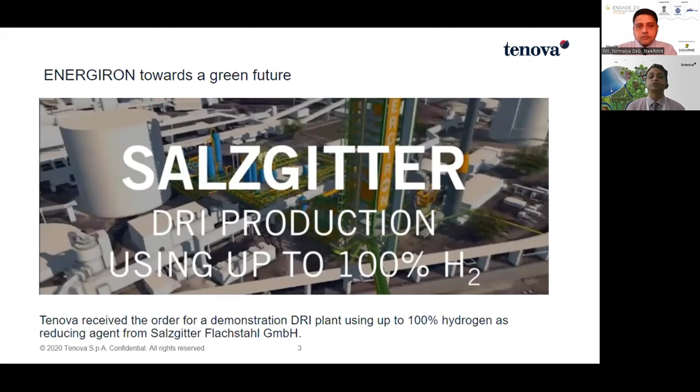Now, before China, we already implemented such projects in Salzgitter. Salzgitter is in Germany, where we are already doing a project for them using 100% hydrogen. That is basically part of Salzgitter Low CO2 Steelmaking in Germany. I'll explain more in the subsequent slides.

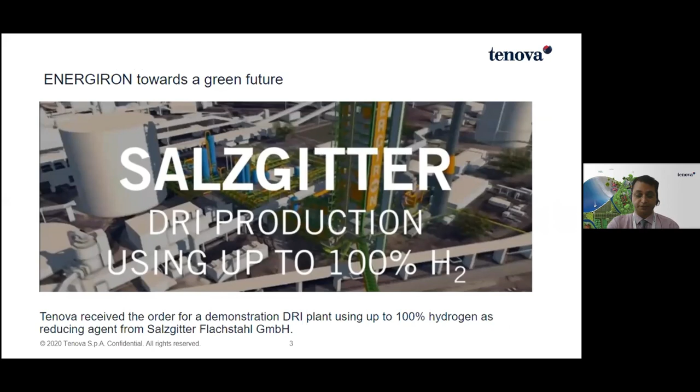Then HYBRIT. I think you might have heard about HYBRIT in the recent news. This is in Sweden, done by SSAB. This is fossil-free steel, the world's first fossil-free steel making plant. And Tenova, we are proud to be a partner of this mission. Now the plant is in operation in Sweden.

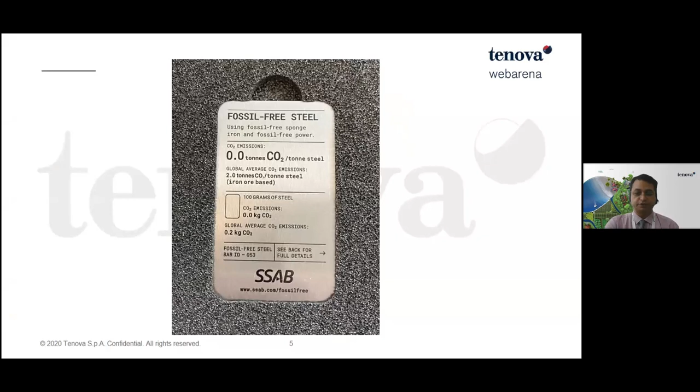You can see the fossil-free steel in actuality. It is not in concept, not on paper, but it has actually been produced. SSAB fossil-free steel, where we have supplied our DRI plant.

Now, who we are, just to give you a brief introduction. Tenova, we are part of Techint group. I'm just putting on the laser mode. So you can see we have 17.5 billion of annual revenue. Why I'm showing this slide, I'm not going to promote our company, just to make you aware that Tenova is part of Techint group, where you will find the major component in terms of sales,

Tenaris and Ternium. Tenaris and Ternium are basically our steel making group. Tenaris makes around 8.5 million tons of seamless pipe, and Ternium around 12.5 million tons of flat product. So we are part of a steel making group, and we know how steel is made.

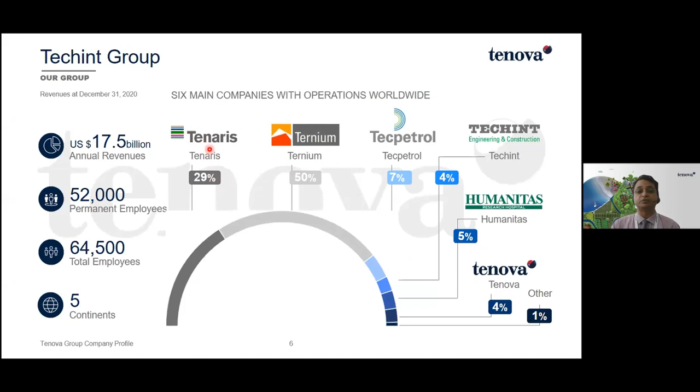So what we mean to say is that we are part of Techint group, which itself produces steel in a sustainable way, and we are associated with it. So we know how sustainability plays a very important role for Tenova individually. So who is Tenova? I'm taking just one slide and then we'll jump to the main topic.

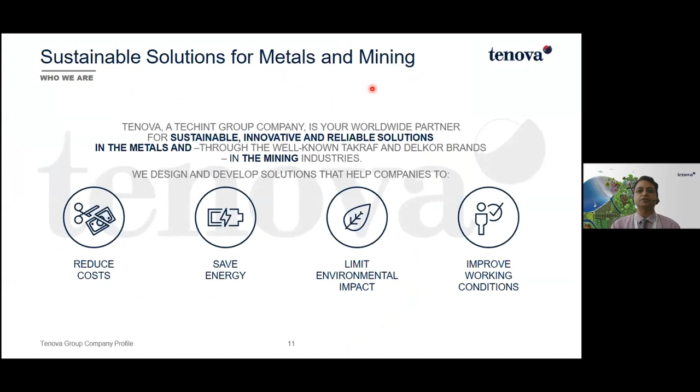We provide sustainable solutions for metals as well as mining. We are part of the group where we focus on sustainability. And considering sustainability, we have come up with a new word, where you will find Tenova appearing in that sustainability approach. So this is our mantra, and that is why we developed a new word.

We have a worldwide presence, not only in India, in all these major cities, Mumbai, Chennai, Calcutta, Bengaluru, and we are also focused on China. So in this presentation, I'm going to focus on China and India because that is the topic.

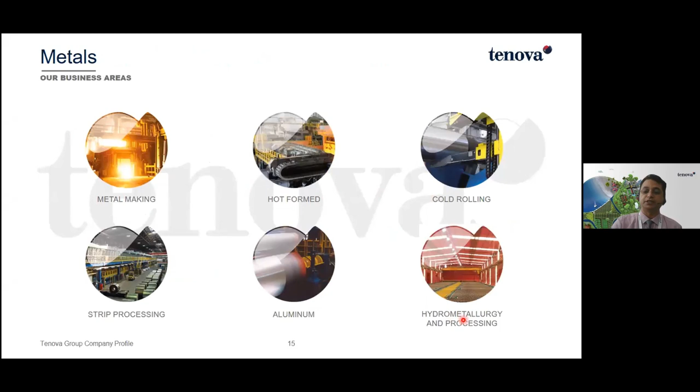DRI. So some basic concepts of DRI making I'm just going to touch upon, because in India there are a lot of coal-based DRI, there is the blast furnace route, and there are other routes also. So I'm just going to touch upon very basic chemistry, what we learned in elementary school. Reduction with coal. Reduction means reduction of iron oxide. So this is a typical example of a blast furnace, which is more into coal.

That is why you might be hearing that most countries are eliminating the blast furnace route and going ahead with either the scrap route or the DRI route. Why? The main reason is to reduce the footprint. You see, carbon is converted into carbon monoxide. This carbon monoxide acts as a reducing agent. Reducing means reduction of the iron oxide from Fe2O3 or Fe3O4. We are reducing it to Fe and CO2.

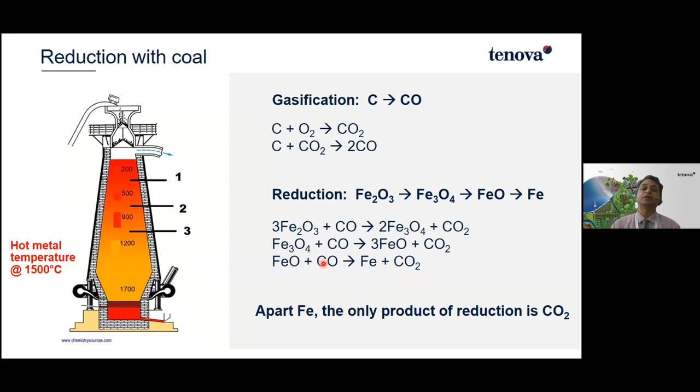So at the end of the day, apart from iron, of course, we are also generating CO2, 100% CO2. Why? Because we are using carbon monoxide as a reducing agent. Unlike that, if you are using natural gas in a typical DRI plant, methane is getting broken down into carbon monoxide and hydrogen. Here you will find hydrogen is also coming into the picture for reduction. Carbon monoxide and hydrogen, both are coming into the picture.

And at the end of the day, in such a process, in a DRI plant, we are putting in the iron ore and getting the DRI. Of course, there is no coal. They are using the methane coming from the natural gas for making these two reducing gases. And at the end of the day, apart from iron, after the reduction, you are finding carbon dioxide and water. So we can say that there is a 50% reduction in CO2 as compared to the blast furnace.

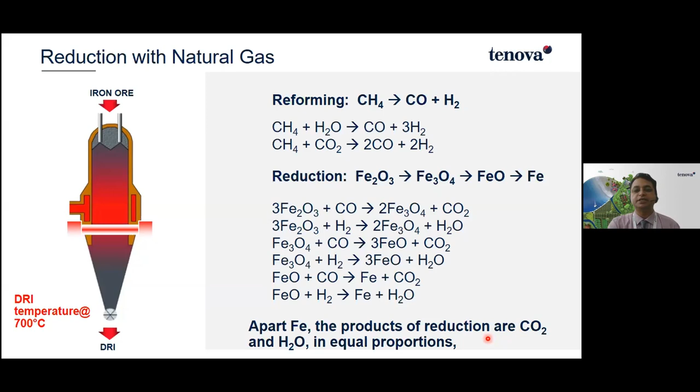But our aim is not to stop at 50% carbon reduction. We should go for zero emission. And that is the main concept we are discussing in this forum. Now here hydrogen comes into the picture. I'm talking of green hydrogen, I'm repeating, green hydrogen, which can be obtained from electrolysis of water. And you can see we can produce oxygen as well as hydrogen.

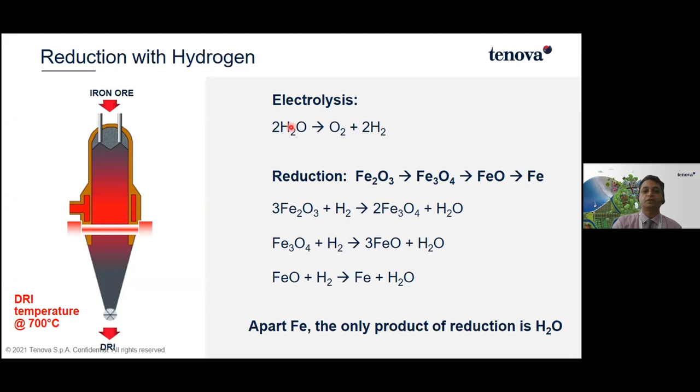And this hydrogen is used for the reduction of the iron oxide. And finally, what we are getting is only water. So this should be our mission. This is our mission for zero carbon, which we can achieve from hydrogen if we are doing it through electrolysis. So this is our DRI plant.

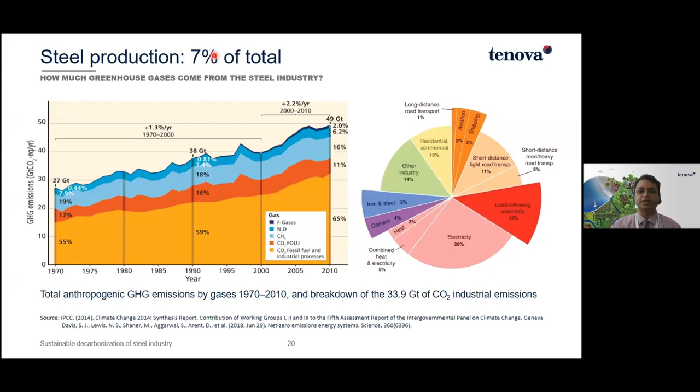Now, why are we talking about steel plants? Because it is a known fact that steel plants account for 7% of total greenhouse gas emissions. So definitely 7% is not less. So we should focus on this. That is the main concept here. Now, this chart you can see. This slide gives you the basic overall view of the decarbonization steps we have to follow.

At the top vertex of this triangle, you will find carbon, and on the downside, on the left side, you are finding hydrogen. So the aim is to move from carbon to hydrogen. This is called decarbonization, but it cannot be done in a single attempt. It has to be done in various steps.

Initially, you can see here, when it is based on carbon, of course, coke and coal are used in the blast furnace route. Yes, there are systems for smart carbon usage or smart carbon utilization. That is what people are doing, because those things we can store and utilize in the blast furnace route, as well as then we go further down.

Then there is DRI, which is based on natural gas or syngas or whatever gases are available. This is the DRI. So furthermore, 50% CO2 is getting reduced in this stage. Rather than coke, it is substituted by natural gas or any other reducing gas, which will reduce the iron oxide. Then finally, coming down, it is hydrogen.

Here, the aim is carbon direct avoidance, rather than capturing and utilizing. Why not focus on a zero carbon effect? That is, avoid the carbon from the source itself. And that is how hydrogen comes into the picture. And by hydrogen, we are referring to green hydrogen. What is meant by green hydrogen? Hydrogen generated using renewable energy to produce electricity, and that electricity goes into the water to generate the hydrogen. So that is the concept we are moving ahead with.

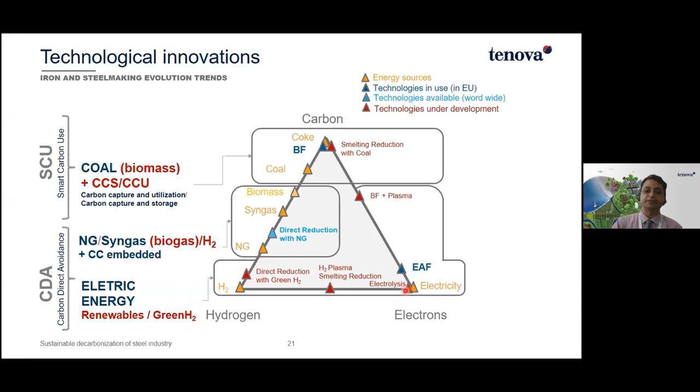Of course, there is the electric arc furnace, which uses electricity. That electricity too, if we can generate it renewably. That is another topic which we can discuss.

Now, the main question is how to make steel in future. On this slide, you can see our understanding of the steelmaking process based on the conventional iron making route, DRI and EAF, using natural gas in the present scenario, but also open to take hydrogen if available, and it will replace the methane.

And in our DRI model, in the next slide, I'll show you that whether it is natural gas or hydrogen, it hardly makes any difference, because these two gases act as reducing agents, as I have shown you in the previous chemical equations. The iron is getting reduced, and that can be melted for steelmaking. So hydrogen, if available, can substitute the natural gas.

And as for how hydrogen is generated, the main thrust should be renewable energy. That is more important, whether it is windmill or solar. So we generate the electricity, and in the electrolyzer, convert the water into oxygen and hydrogen and make green steel.

So the main theme here is that we should be ready with the flexibility of using whatever reducing gases are available, and our adaptability and preparedness for the future. That is more important, and China is already on this path.

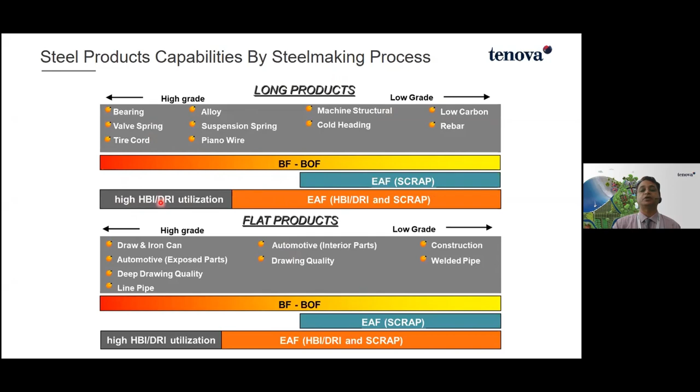For making high grade, you need some virgin source like pig iron or DRI or HBI to make high grade steel, whether long product or flat product. So if one is installing DRI, it can cater to both long as well as flat products for low and high grade. So it can be a substitute for BF if you are opting for DRI, being a virgin source.

Now, this was the brief about the chemical scenario, economic scenario, market scenario, and how we can move ahead with DRI making based on hydrogen. Here you can see our HYL DRI technology, jointly developed by Tenova and Danieli, and this is what we are going to brief you on in the next slide.

Here you may observe there is selective removal of CO2, because if you are using natural gas, definitely there will be CO2. As I mentioned, 50% will be CO2 and 50% water. So that 50% CO2 we are also not releasing into the atmosphere. Here the carbon capture unit and carbon capture storage, smart carbon storage units come into the picture.

In our system, this is our DRI plant. I'll just explain. We put in the iron ore and finally we get either cold DRI or HBI, or hot DRI into the adjacent electric arc furnace.

And nowadays the trend is to make pig iron. This is a substitute to the blast furnace, an alternate route of making hot metal. You put the DRI, and the DRI we get in our furnaces, in our DR module, in the HYL module, is high carbon DRI. High carbon DRI means carbon content from 1.5 up to 5%. So if you are using 4%, 3.8%, or 4.2% carbon, it's very good. If you install an OSBF, open slag bath furnace, this is basically a type of DRI melter in a reducing atmosphere, and we get hot metal with exactly similar composition to blast furnace hot metal.

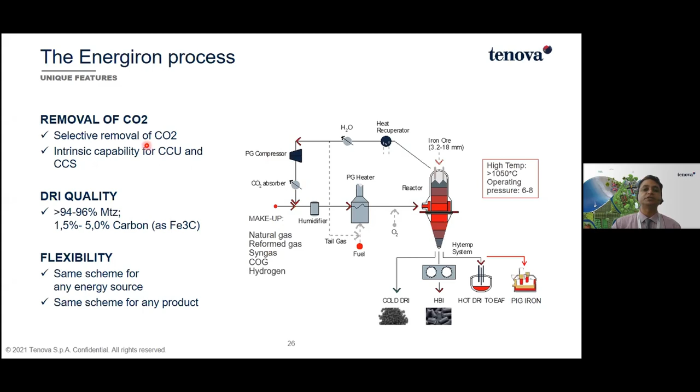Yes, here is the CO2 removal system, as I was mentioning, we inherently remove CO2. This is very important, because if you are using pure hydrogen, there won't be any CO2 generation. But in the case of methane or any other gases, there will be some CO2 generation. What we do, through a selective removal system, is remove 60% of the CO2 generated in the system, and this CO2 gives added value to you as a byproduct. It can be used for food and beverage industries, production of dry ice.

It can be pumped into oil wells for boosting oil production, like the people at Emirates Steel are doing. Companies like Ternium and Tenaris sell it to Linde and other companies for food and beverage industries. In Indonesia, they use it for food industries. At JSW Salav in India, the CO2 is sold to Air Liquide for making dry ice. Emirates Steel, as I mentioned, uses it for enhanced oil recovery. So whatever CO2 is generated, we are not emitting it to the atmosphere—we are capturing and utilizing it properly.

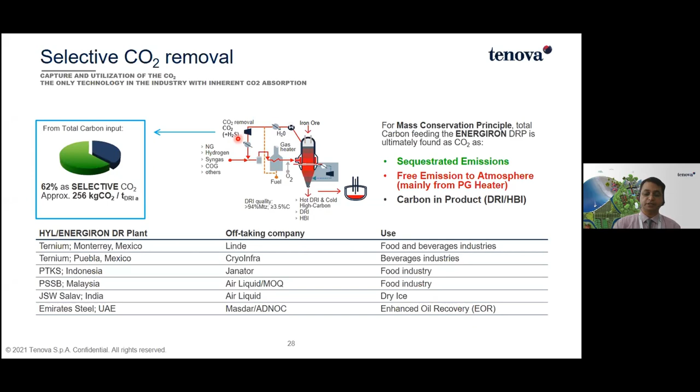Now, pig iron production via the DRI plant—that is what I was just mentioning to you before.

Yes, more importantly, here you can find the DRI plant clubbed with an open slag bath furnace. This is a reducing furnace beneath it. What is the advantage of this? One feature is that we are producing high carbon DRI on top—in our system, we produce high carbon DRI more than 4%. And there is a reducing arc furnace, basically a submerged arc furnace.

It appears like a submerged arc furnace, but we work in a brush arc mode. Basically, it does the reduction and helps us melt the DRI from 600 degrees to 1400 degrees centigrade, same as blast furnace hot metal, and it can be poured directly to the torpedo ladle. The other advantage is that we can maintain the BOF facility downstream—we just have to replace the blast furnace. No need for occupying more space; everything happens in a vertical chamber.

A very important factor here is that we are not depending on DR grade pellets. BF grade pellets can very easily be utilized, so we don't require any DR grade pellet—only the BF grade pellet, a low cost pellet, can be used. Why? Because the gangue, whatever comes with it, can be removed in our open slag bath furnace—OSBF, we call it. And the slag we get can also be used, just like in a blast furnace, in the concrete industries.

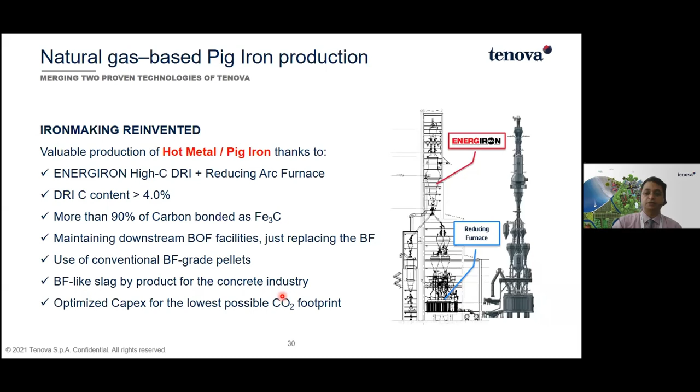Coming more into this concept, pig iron production via DRI. Here you can see the real plant. The DRI is on the top and OSBF, open slag bath furnace, in the bottom. There is a provision for removing the slag, just like in blast furnace, and we can also tap the hot metal in the torpedo ladle, which can be utilized in the existing downstream facility. So there are various advantages of this type of furnace.

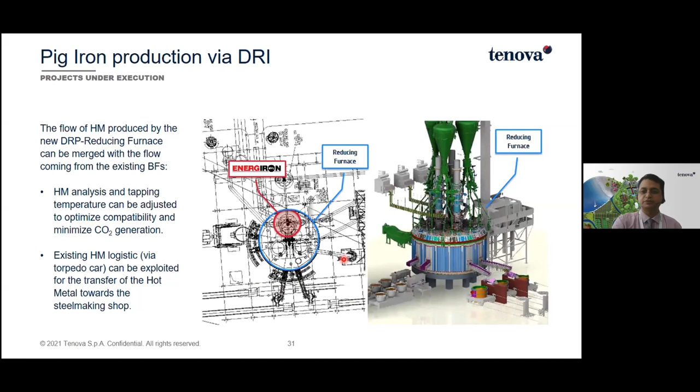You don't need such a big transformer as compared to the electric arc furnace, DRI and electric arc furnace route, wherein you need a high transformer, flicker, then SVC. Those things are not required. This is why it appears like a submerged arc furnace having the Soderberg paste electrode. The refractory life also lasts up to 5 to 10 years. Unlike in electric arc furnaces, the building is very small. There is no building as such. It is installed just beneath the DRI plant. So this is one of the concepts already being implemented in various places.

Hydrogen-based DRI. Now we are coming back to the topic. Carbon capture unit utilization, carbon capture utilization, or carbon capture storage, whatever it may be. Our aim should be carbon direct avoidance. Directly we have to avoid the carbon.

So you can see this is the DRI plant. As a reducing agent, what we are using is hydrogen, pure hydrogen. Hydrogen, how is it getting generated? From electrolysis. And electrolysis, how are we getting the electrical energy? That is from renewable energy. We are not using any thermal energy.

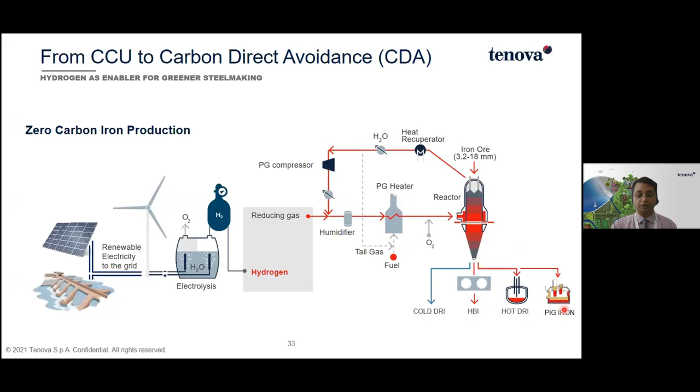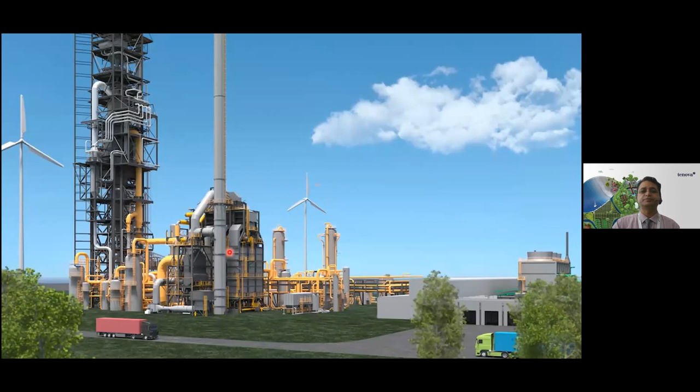And this is the scheme what we have just explained to you, that we can be able to make whether it is cold DRI, HBI, hot DRI, or pig iron. This should be our vision: DRI plant clubbed with the solar panel and the windmill, and we generate the electricity, and that electricity can be used. So this is a total iron making facility. This is a process gas heater, and this is basically our DRI tower.

Experience of using hydrogen. Then you may ask, what is the experience of using hydrogen in our HYL technology? Even if it is methane, we are using hydrogen as our reducing agent as compared to carbon monoxide. So the more the hydrogen, the happier we are as a technology supplier, as a process maker. So the same scheme can also be fitted with high hydrogen.

You see here, we have done this in the 90s, some 30 years ago. With 90% hydrogen we trialed and tested, well proven, not an issue. That is why what we are thinking now with hydrogen, we have already done long ago as a pilot test, and it is quite successful, and that is why we are available in the market for using this type of hydrogen based DRI.

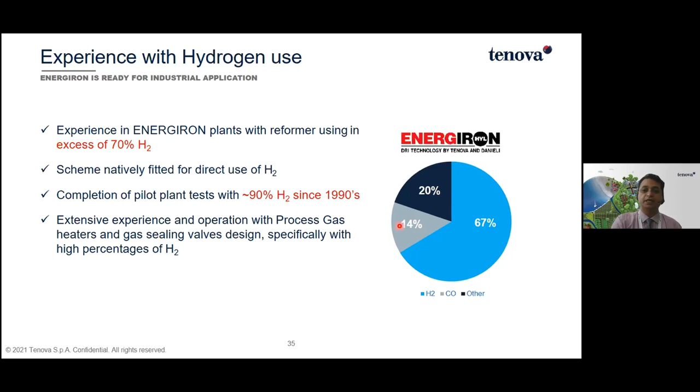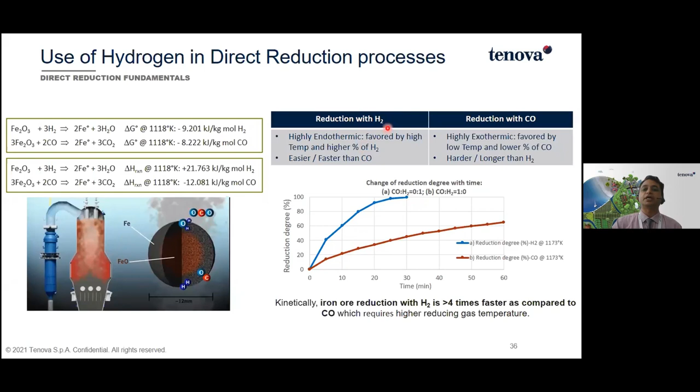I'll explain the advantage of hydrogen as compared to carbon monoxide. Of course, carbon monoxide generates CO2, but hydrogen doesn't generate any CO2. From an energy balance point of view, there are two reducing agents when reducing these gases: either hydrogen or carbon monoxide. But with hydrogen, apart from not generating CO2, the other advantage is the reaction is very fast. If hydrogen reduces iron oxide, it is 4 times faster compared to carbon monoxide. That is why we are able to utilize more hydrogen as a reducing agent, because our purpose is to reduce the iron oxide, and that is what we are doing.

Yes, I was mentioning about the pilot plant, what we have been doing in the past in the 1990s. This is the actual plant. We did it as a pilot plant, but it is not on the lab scale, it's an actual plant. We installed it and tried it in the 90s for 90% hydrogen. We did everything, we made it, and now the same concept is being adopted at various steel makers.

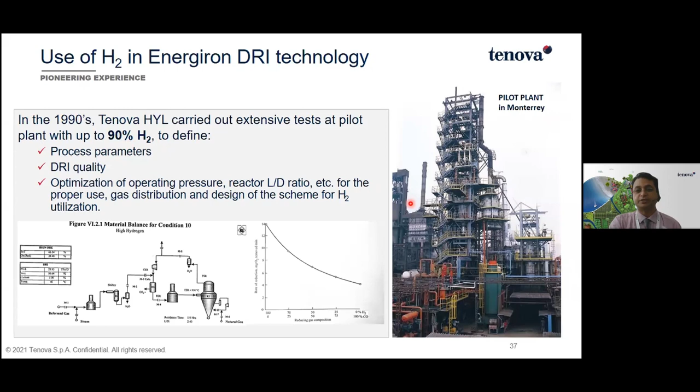It is more efficient because we are working at high pressure as compared to the other technology available in the market for gas-based DRI. In our system, we are working at high pressure. The reactor itself is pressurized, 8 bar, as compared to the other technology available in the market at 1.5 bar. With high pressure, you get high temperature also, definitely. The equipment is much less, and more importantly, we are able to use very little electrical energy compared to the systems available in the market which work in the low pressure system.

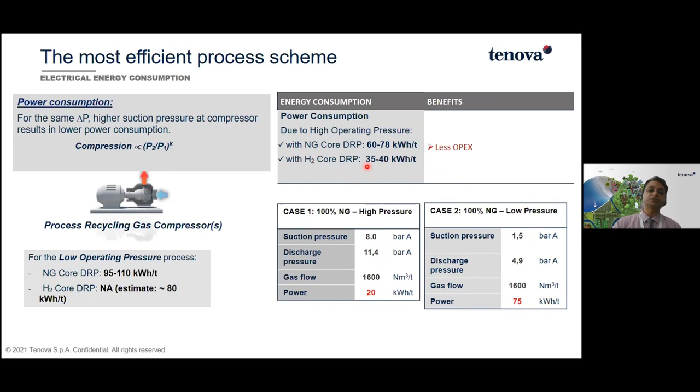That is why OPEX is also very, very less as compared to. Even furthermore, if we are using hydrogen in the same proportion, it is much better as compared to natural gas in terms of energy consumption. So in this slide, this is what we are showing, the energy benefit in terms of switching from natural gas to hydrogen.

Because in China, or wherever we are installing this plant, those plants are equipped to use either 100% nitrogen, 100% natural gas, any proportion like 35%, 55%, and gradually to 100% hydrogen, and vice versa, or any combination of gases. But if you are using more hydrogen, the energy consumption will be very less. So this is what we are trying to show here.

And coming to the CO2 emission, definitely there is a benefit if we switch from natural gas to hydrogen, and if that hydrogen is green hydrogen, then it is called zero carbon emission.

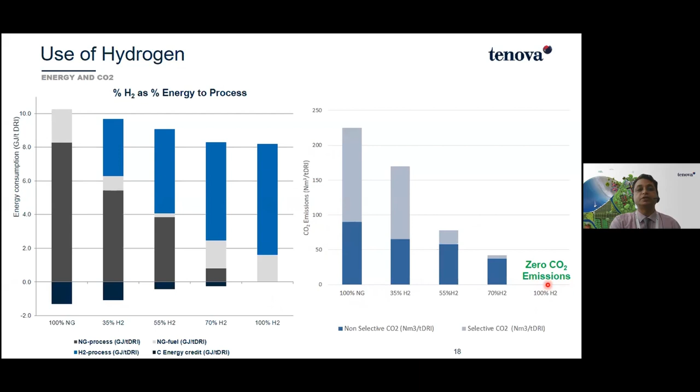So you can have an idea of around how much hydrogen is needed to make 1 ton of DRI. This may be your question. Yes, for making 1 ton of DRI, we need approximately, for the reduction purpose, around 50 to 55 kg of hydrogen. That is equivalent to around 600 Nm3 of hydrogen.

And another question may come up - for generating 1 kg of hydrogen, how much electrical energy is needed at the electrolyzer? That comes out to roughly around 40 kilowatt hour. 40 kilowatt - so you can see it is not less. We need a huge amount of electrical energy to do the hydrogen generation.

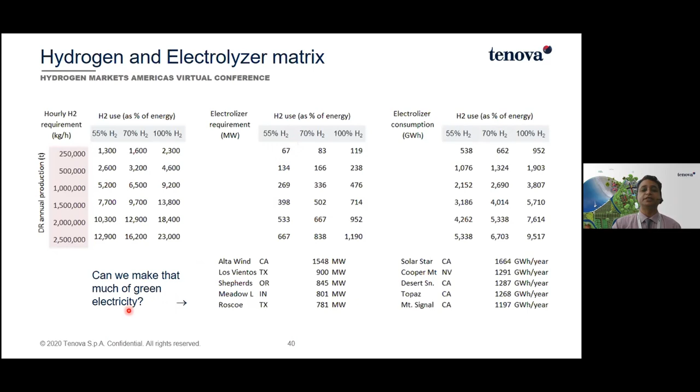But anyway, people are working on it, and the day will definitely come when hydrogen production will be much more economical. But this is going to be in the future. Here we are talking about green electricity - if we do it from green electricity, it is much more beneficial.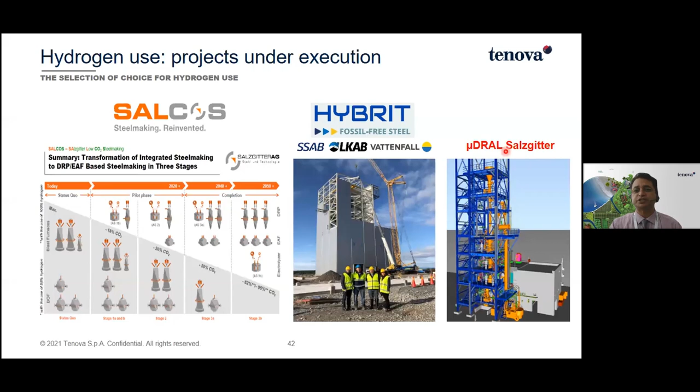This is in Salzgitter, the same. This is a demonstration plant for SalCos. Yeah, this SalCos, which I was mentioning - this is the same elaboration I did, that in a gradual way they are switching from blast furnace BF to DRI EAF. Of course you will find the electrolyzer here. Once it gets implemented, they will switch over to the 100% hydrogen based system.

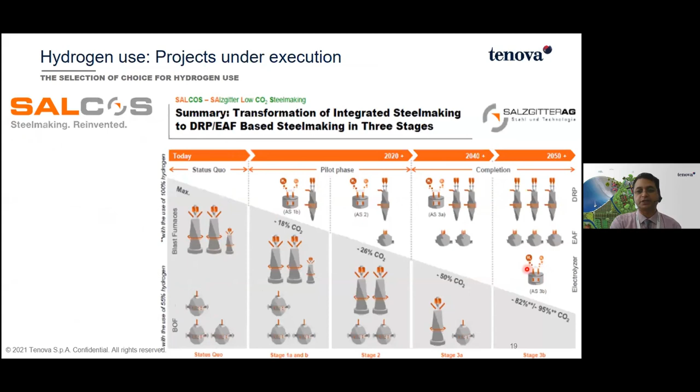So the SalCos approach - I'm just mentioning, there are further more slides on this. Conventional coal-based BF route.

Why am I referring to Salcos? Because the same philosophy is now being adopted by China. These two plants which I was mentioning use the conventional coal-based BF route, because in China also, right now, these two steel makers which I have shown are making steel mainly through the BF route, and it is accounting to 1.6 ton CO2 generated per ton of liquid steel. Of course, for the Indian case, it is more, something around 2.2 ton.

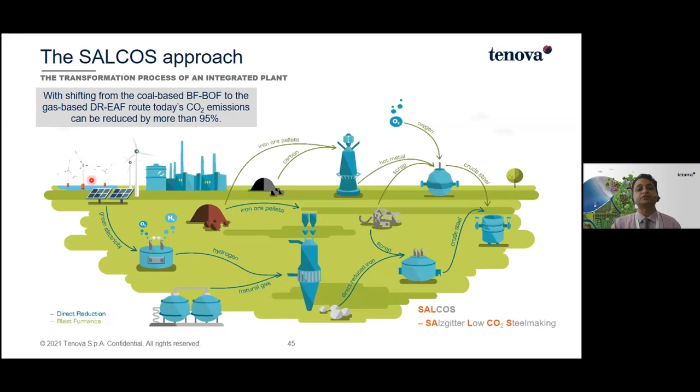What is going to be the future? The shifting and transformation process will be from BF to DR, the gas-based DRI route, to reduce emissions by more than 95%. You see the dark blue line, that is direct reduction. You install the DRI plant, install the electric arc furnace, and make the steel out of it. Downstream facility will remain the same. This can utilize natural gas, or it can use hydrogen in any proportion. The hydrogen is generated from green electricity. So this is the approach of Salcos.

In Salcos, there are a lot of agencies involved. Our part is to generate the DRI, to make the DRI plant. Other agencies are involved for the electrolyzer, wind energy, solar energy, converting into electricity, and feeding that electricity into the electrolyzer. So there are various agencies involved in the Salcos project.

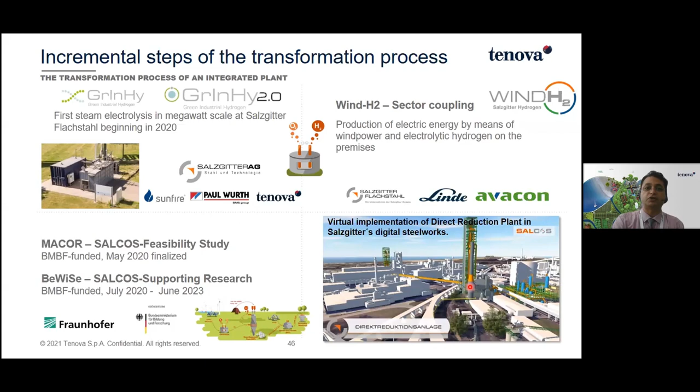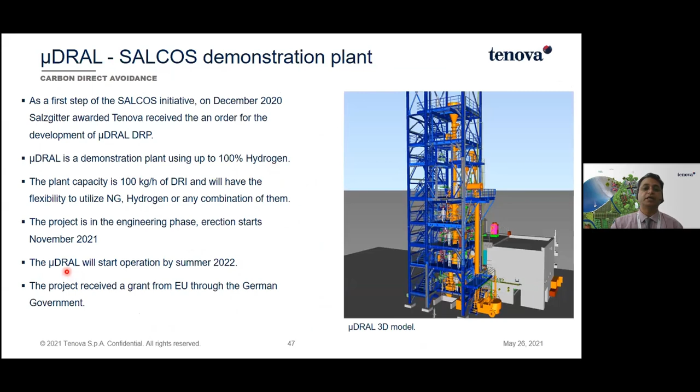So in a nutshell, back to Salcos, there is a DRI plant equipped with the best available technology, running with natural gas and/or with green hydrogen, and this is basically a part of the carbon direct avoidance.

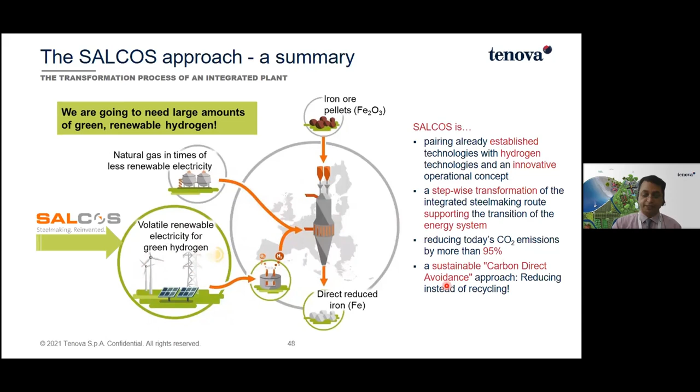They have made the calculation to create awareness of the German case: whatever capacity they are generating, 10 million ton of steel, if they implement this Salcos project, they will save emissions equivalent to 4.6 million cars. That is roughly around 10% of German cars emitting emissions, and equivalent to the CO2 absorbed by 500 million trees, which is 6.6 times the Berlin city. So this is only to give you a picture of how carbon footprint reduction will benefit common people in terms of understanding the implication.

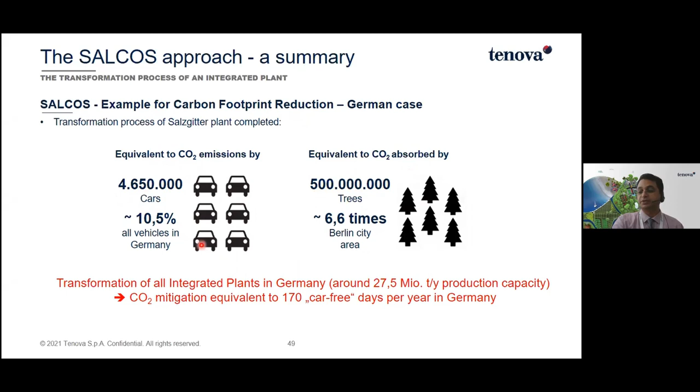This is the HYBRIT project, as I mentioned, which you might have seen in the recent news. The aim is to replace coking coal with hydrogen, and the main effort is to reduce CO2 and decarbonize the steel industry. This is the project in Sweden, already commissioned and in production. You might have seen the small sample I showed in the previous slide. Inside there is a DRI plant, and we are supplying our DRI plant, so there is no carbon footprint. The plant is now in operation.

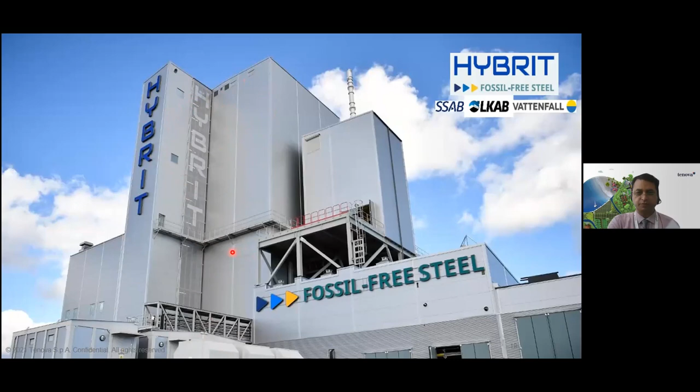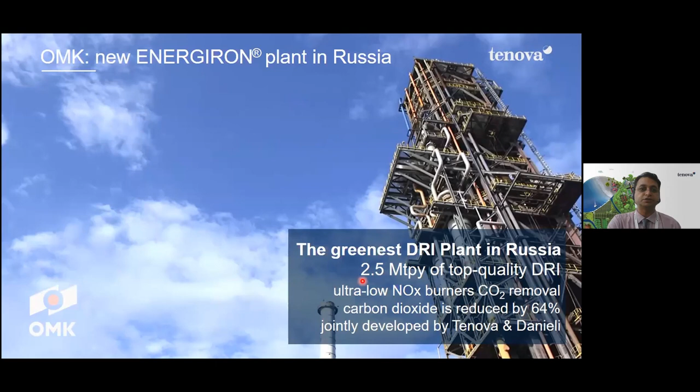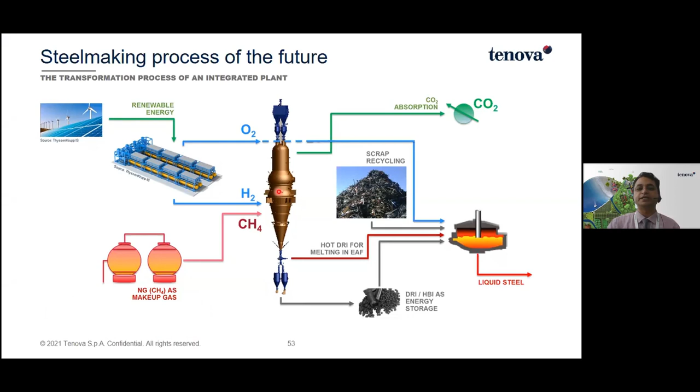From Russia, I think we should quickly jump back to China, since Russia is already in the news. Coming back to China, the world's first DRI plant, as I mentioned, is already being implemented, and we see that this plant will be in operation in 2022. This is HBIS group, the third world's largest steel producer. So again, whether it is natural gas or hydrogen, our DRI is capable of making the steel. This is the main aim of showing this slide.

Coming back to the hot metal, just to give you the basic idea of how we are talking about replacing the blast furnace with the DRI.

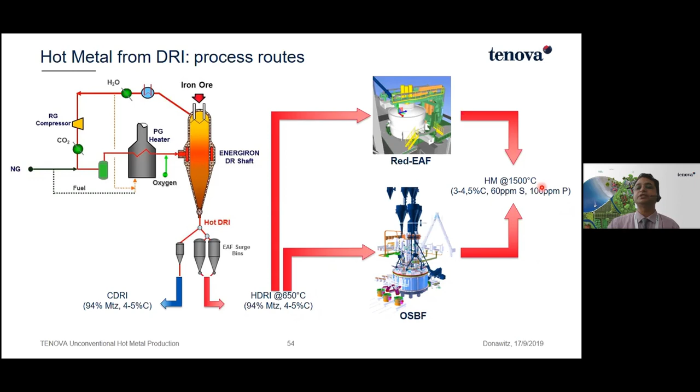This is the DRI. We are making the high carbon DRI, that is if you are using natural gas, 4 to 5% carbon. This high carbon DRI at 650 degrees will be melted in our OSBF. Either you can put it in an electric arc furnace, or use it in the OSBF. The advantage of OSBF is that it removes the slag, silica and whatever is coming in the iron ore, so we can use BF grade pellet or even low grade pellet. We are not bothered about how much gangue is there, because we do the adjustment here, including the adjustment of carbon. When it's 4 to 5% carbon we are happy, but if we replace natural gas with hydrogen, there won't be any carbon in the DRI. We can add carbon in OSBF to maintain the same consistency of hot metal, and downstream you can use the BOF or LD shop, which is already prevailing.

For example, to give you more idea on reducing the carbon footprint: pellets are normally required. The existing practice nowadays is that whatever pellets are there, you install the blast furnace, and then it goes into the BOF. But with DRI and OSBF, you use the same BF grade pellet - we are not asking for the costly DR grade pellet. Use it in the DRI plant, melt it in our OSBF, make the same chemistry of 4.5% plus or minus, whatever you are getting from the hot metal, pour it in the same torpedo ladle, and use the same downstream facility for making steel. In this process, you reduce 50% CO2 emission if switching from coal to, here I'm referring to natural gas as the reducing gas.

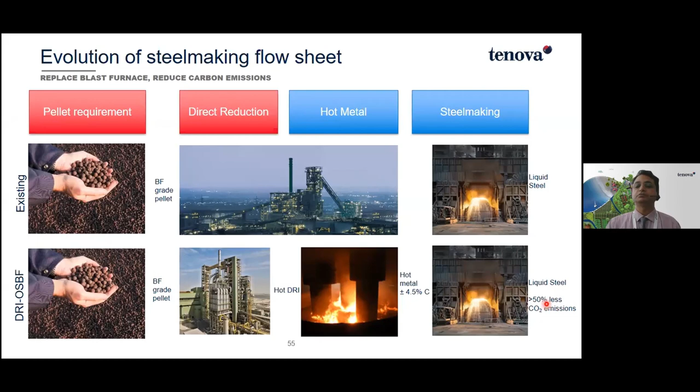But if you go with hydrogen, of course we have to see the economics of hydrogen, at what rate hydrogen is available. And then there will be a 95% reduction in CO2 emission.

Now coming back to scrap. If you have scrap, as you know, we have the technology of melting scrap in our electric arc furnace called Consteel. This is a way to reach carbon neutrality. China has already been on this journey for the last 20-25 years. In China, they have either hot metal from blast furnace, or scrap, so they play between the two. We have more than 60 installations of such Consteel electric arc furnaces in China. And now they are switching from the scrap-DRI route, moving to iron ore using hydrogen-based DRI.

Already two large steel players, HBIS and Baosteel, are already on the job - install the OSBF, or you can put a typical electric arc furnace, and from OSBF you can make the hot metal which goes into the BOF, or else you can install an electric arc furnace.

There is one more furnace concept which we can discuss in a separate forum, called the Flexi Modular Furnace. This is also quite commonly available - we have supplied it in China. They use this furnace with flexibility in terms of charge mix, whether it's DRI, hot metal, or scrap, in whatever composition or proportion available, we are able to make steel out of it. It can work in BOF converter mode, or in typical electric arc furnace mode. That's why we call it the Flexi Modular Furnace.

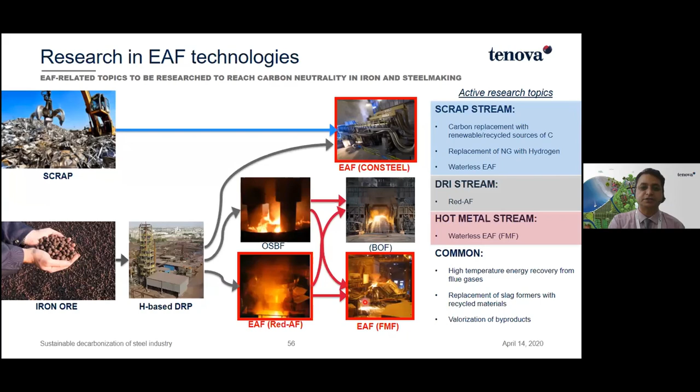There is yet another plant in Black Rock, Quebec, Canada. They have also installed the same plant - presently using DRI with natural gas, and they are also ready to switch over to hydrogen to make high purity pig iron, using the same DRI and OSBF process.

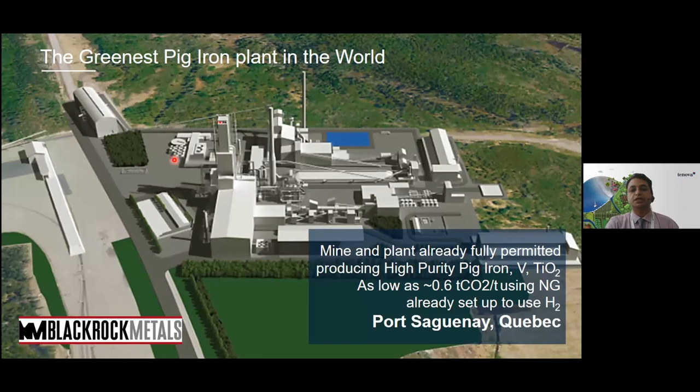So this project is already in the completion phase. We just have to check what the status is. And now coming back to HBIS again, I am showing HBIS and Baosteel. As I mentioned in my previous slide, Baosteel has given us the order for installing the DRI plant, and this is going to be a 1 million ton DRI plant for reducing carbon emissions. These are also fitted to use hydrogen, natural gas, coke oven gas, whatever gas is available, but it is designed for hydrogen.

So thanks. This is my presentation in a nutshell. I think I have completed it in the 45 minutes Mr. Nirmala gave me as the time slot. And if there are any questions, you can ask.

Thank you, sir. A very comprehensive presentation. I have one or two quick questions. First of all, it's very interesting that we are combining pig iron with DRI and dispensing with the blast furnace. But in China, a recent study by BHP showed that the comparative age of blast furnaces in China and India is much less than in Europe and other parts of the world. In China, the average age is about 12-13 years, while in India it's about 18-20 years.

So huge investments have come for new blast furnace building in China. How does that fit with DRI, dispensing with blast furnaces and feeding the BOF directly with DRI? Now that so much investment has already gone into blast furnaces, how long could it take for China to gradually move over to DRI?